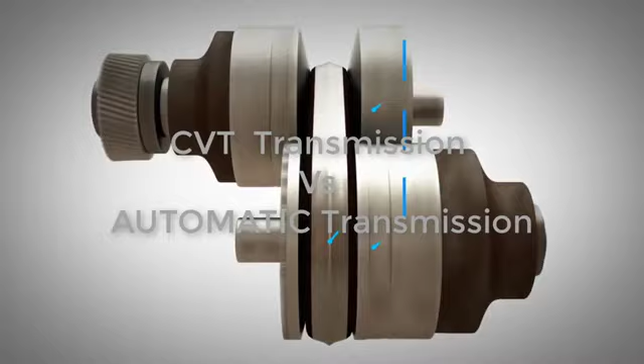CVT transmission versus automatic. Let's first talk about CVT transmission.

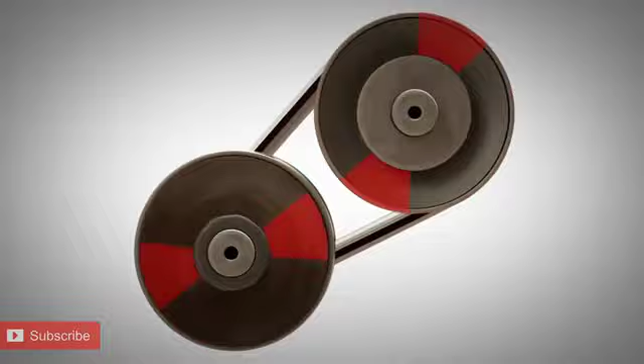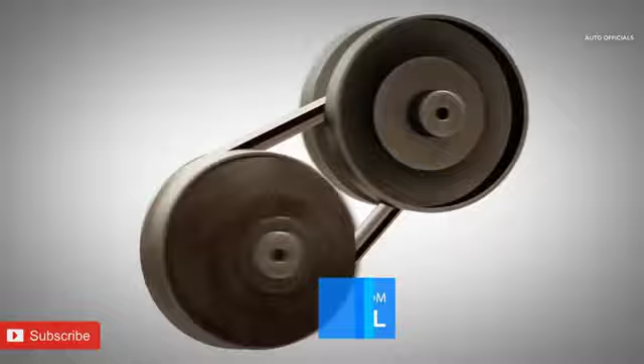In order to see how a CVT works, How Stuff Works explains you need to understand a manual and a traditional automatic. A manual has a set number of gears, and the driver determines what gear ratio they need. An automatic also has a set number of gears, but it uses a hydraulic system that responds to pressure created by the conditions to determine the gear needed without any input from the driver.

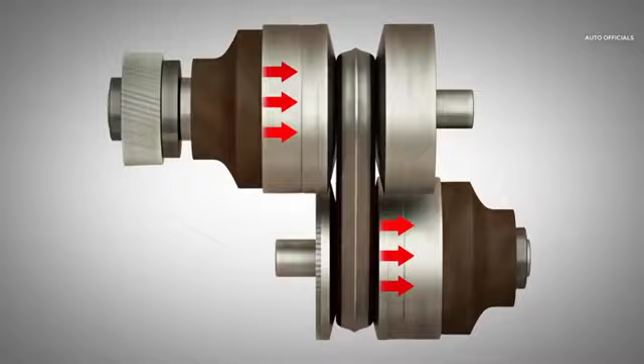A CVT is similar to an automatic in that it doesn't use any input from the driver, but that is where the similarities end. A CVT doesn't have any gears. Instead, it has two pulleys. One pulley connects to the engine, and the other connects to the wheels. A flexible belt connects the two pulleys.

The width of the pulleys changes depending on how much power the vehicle needs. When one pulley gets larger, the other one gets smaller. Since neither the pulleys nor the belt are fixed, they can provide an infinite number of gear ratios, unlike the automatic, which has a set number of gears.

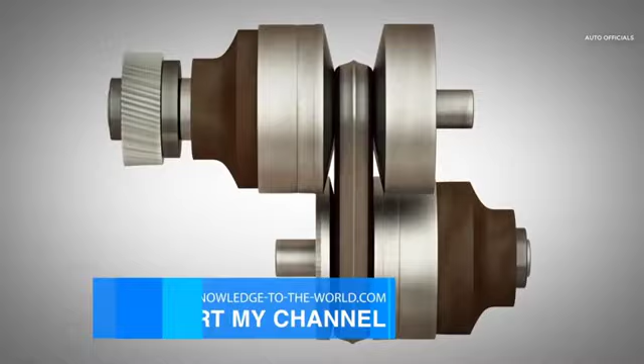Not all CVTs are created the same. The most common type is the pulley-based, but some other types include the toroidal CVT, which uses rotating discs along with power rollers to produce the same result as the pulleys. The hydrostatic CVT uses pumps to control fluid flow, which then produces a rotational motion.

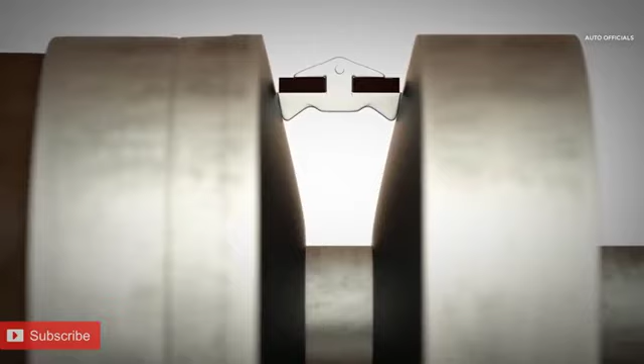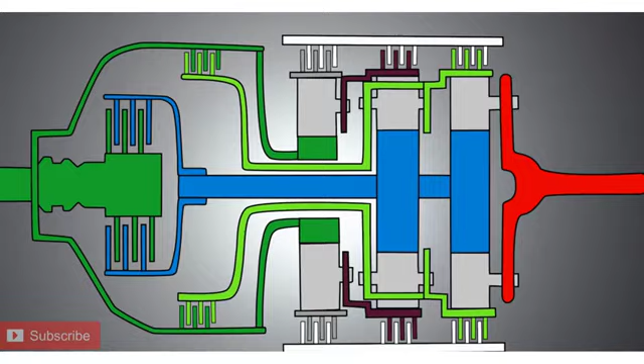Now we talk about automatic transmissions, how they work. How Stuff Works explains that an automatic transmission uses gear sets, a hydraulic system, and a torque converter. The hydraulic system regulates the bands and clutches that control the gear sets, and a pump pushes the transmission fluid through. The fluid pressure forces the shift valves to open and close, which opens different gear circuits.

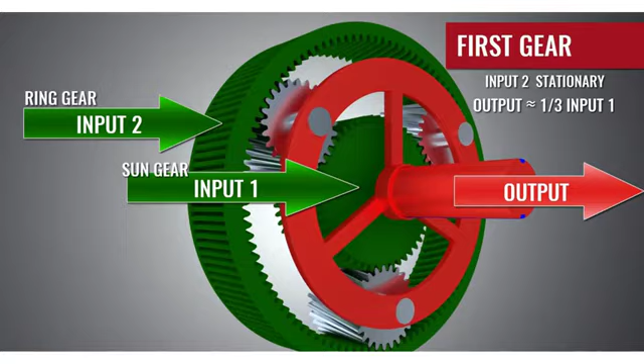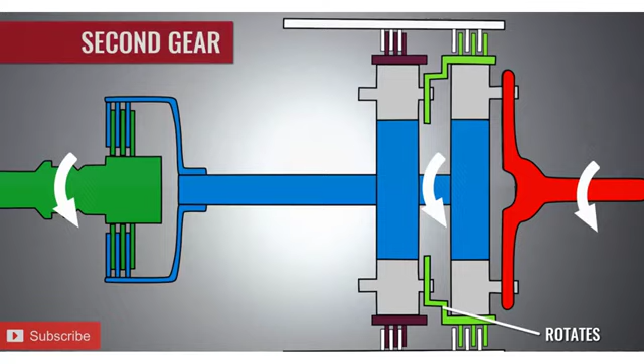Now we talk about advantages and disadvantages of CVT automatic transmission. One of the advantages of a CVT is its ability to continuously change its gear ratio. This means that no matter what the engine speed, it is always performing at its peak efficiency. CVTs often offer better fuel economy as a result, especially when driving in the city.

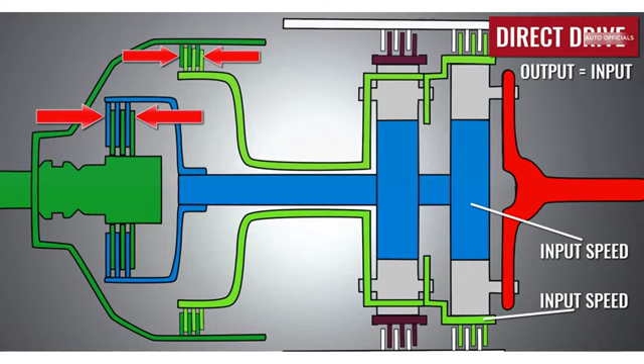Digital Trends says that most cars equipped with CVTs offer a smoother ride than a similar car with a regular automatic. This is because the transmission never shifts. There is no abrupt downshifting when the car needs additional power, and there is no feeling of gear hunting that you sometimes feel with a traditional automatic.

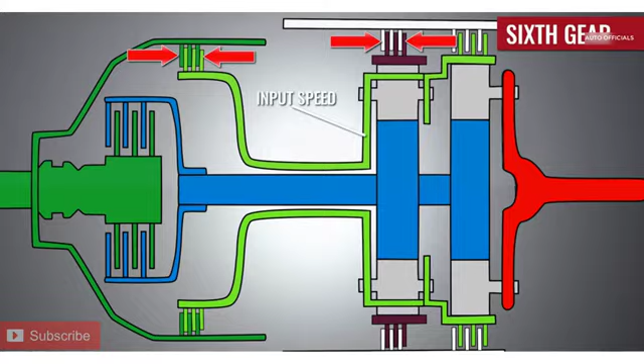A CVT is lighter than a traditional automatic, and this, combined with the smoother operation, helps to improve the fuel efficiency of vehicles that come equipped with a CVT. Because of the lack of gearing, it is easier for CVT vehicles to find and maintain an ideal torque ratio as well. It has an easier time taking off from a stoplight and an easier time climbing difficult terrain because the variable transmission allows it to run in the right gear and stay there.

Now discuss the disadvantages of CVT. While the lack of upshifting and downshifting is considered an advantage of the CVT, some drivers miss the sensation of the vehicle moving through the shift points. If you prefer a sportier driving experience, then the lack of fixed gears makes the ride less engaging.

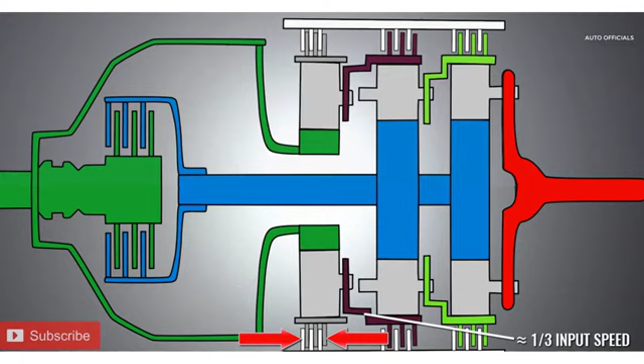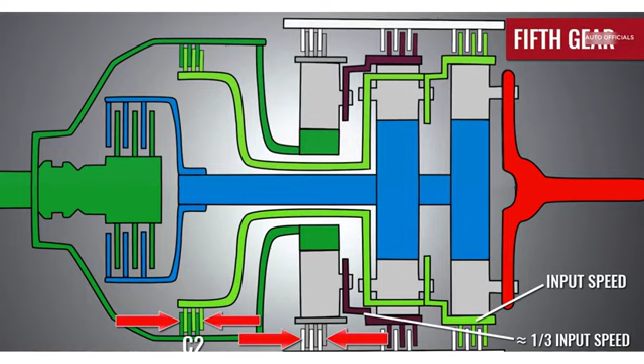Another complaint that drivers tend to make about a CVT is the loud droning sound that occurs during acceleration. This happens because the CVT forces the engine to continuously run at a constantly high RPM as it gets up to speed. As Car Engineer explains, the general public has been less accepting of the CVT due to the difference in noise perception from mechanical or step automatic transmission.

CVTs can be expensive to repair or replace when compared to a conventional automatic transmission. Some of the common problems that owners run into include overheating, slipping, and sudden loss of acceleration. Shuddering is also a common problem. Since CVTs depend on the belts to operate, if these suffer from excessive stretching or too much wear, the transmission can completely fail.

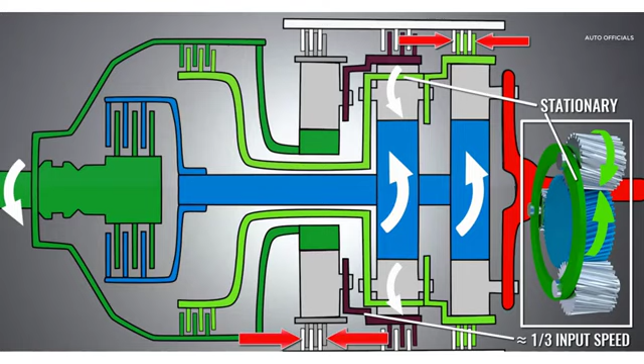AutoDNA explains common CVT cons include: one, they have no feeling of connection between the accelerator and the engine during acceleration; two, there are limits on the engines that can work with a CVT in terms of power and size; three, they don't last as long as a conventional transmission; four, CVTs are harder to work on, and even basic maintenance often needs to be done by a trained mechanic.

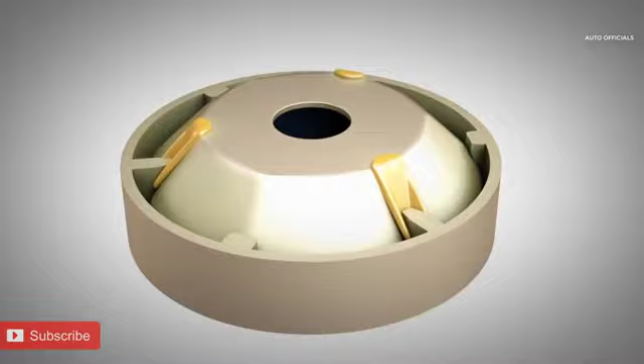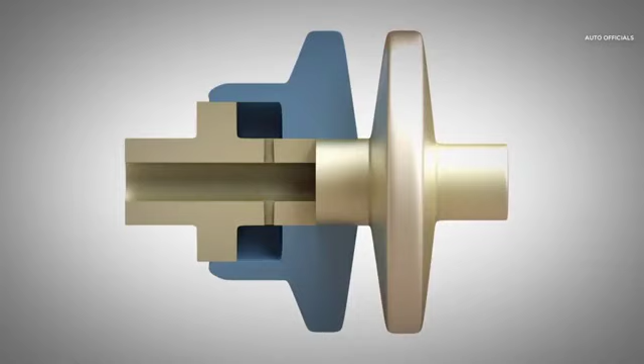Now we talk about advantages and disadvantages of automatic transmission. According to Mr. Transmission, while there are some advantages to having a CVT, traditional automatic transmissions also offer some benefits: one, they have a more connected feeling between the engine and the speed of the vehicle; two, the driver has a better sense of control with actual upshifting and downshifting; three, automatic transmissions are less expensive to maintain; four, they offer a more engaging driving experience.

And disadvantages of automatic transmission are also common. Like a CVT, an automatic transmission also has some downsides. Some of these include: they are less fuel efficient than a CVT, automatics produce more emissions, and drivers have to hunt for gears when climbing hills.

Now you know the difference between a CVT transmission and an automatic transmission. Which one works for you?